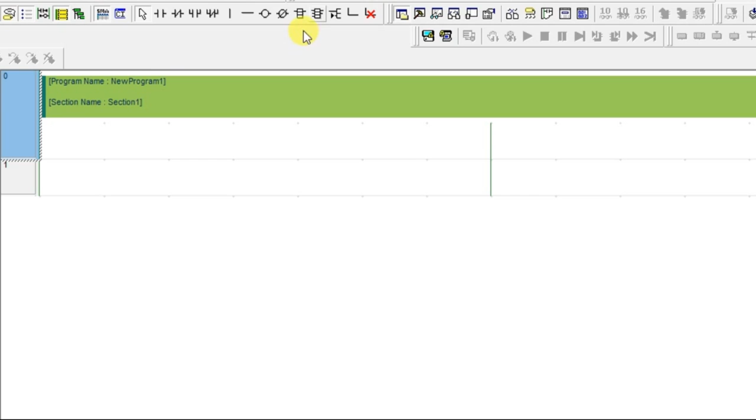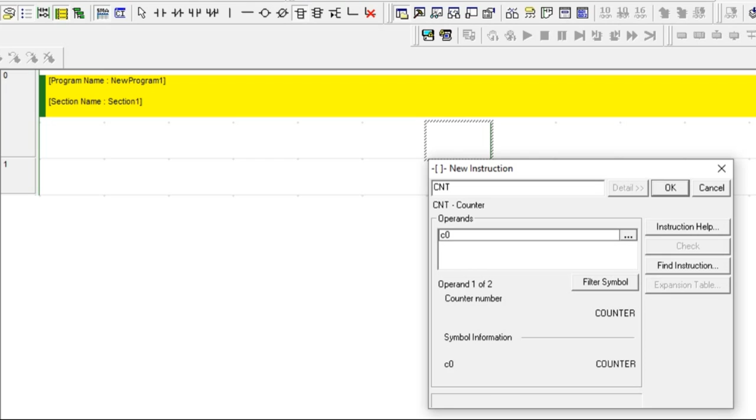Let's take instruction and go for detail, find instruction, and there you can find counter. CNT, this is our counter. Let's take that. It is asking for counter number and the remaining variables. I'm giving the counter number as C0. No need of C, you can give directly the number and give OK.

Once you have given the counter number, you need to set the value - how much count you want to make. Let's take an example: the parcel has to move in a conveyor. So you will be having a sensor. Let's add one sensor here.

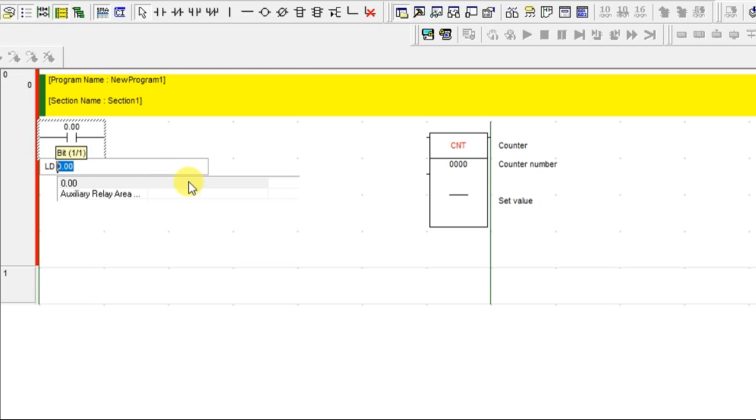Sensor - so whenever the sensor is giving an input, the counter has to increment. Let's take how much count we can do - let's take 5. If once 5 parcels crossed, I have to turn on an alarm. So just type hash and 5.

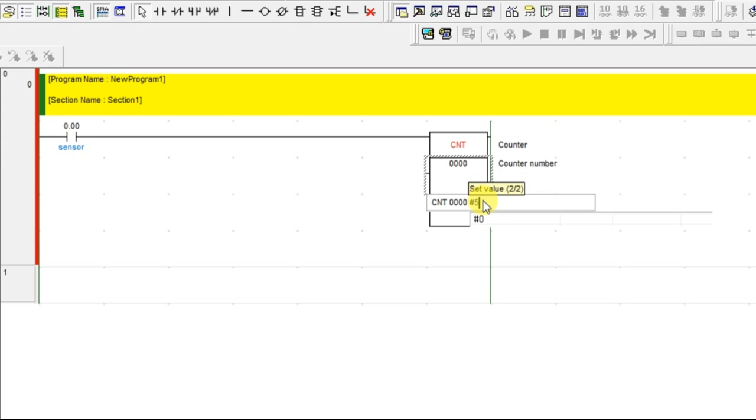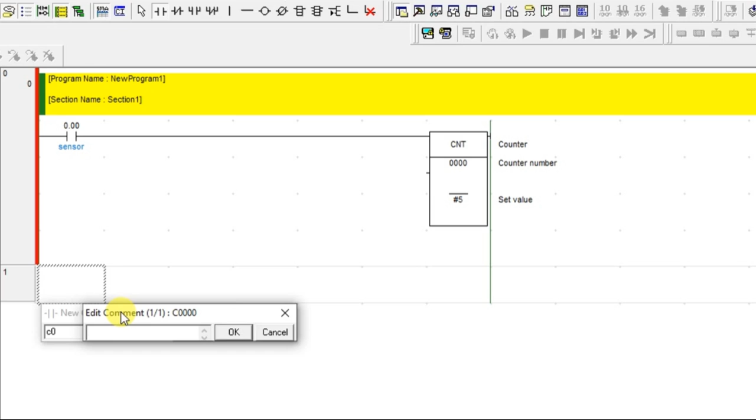That's it, so like this only you have to give the set value. So for every 5 count, it will give a signal. That signal, the feedback from the counter, you can take same as how we take it for the timer - you need to give the counter's address and give it as a normally open contact. So when this contact turns on, whenever the 5 value is reached, it will be on. I'm going to turn on one alarm bit or buzzer bit - let's take it as a buzzer output.

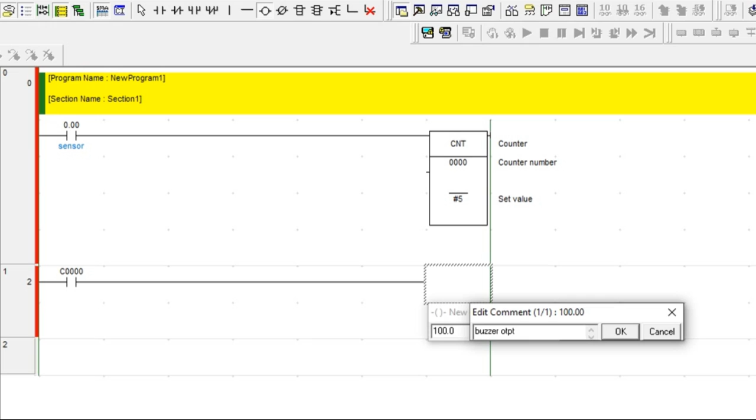Now if you see the counter, we have one more input here. What does that input mean? That is for the reset. So the counter has a reset input - all counters will get reset to start from the beginning.

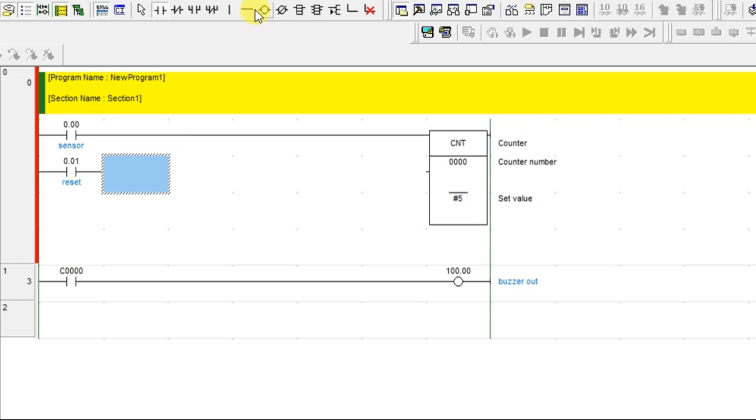After 5 counts, what will happen? The counter output will be in on condition only. Once the output is on, it will stay on only. So how are you going to turn it off? You have to reset the counter.

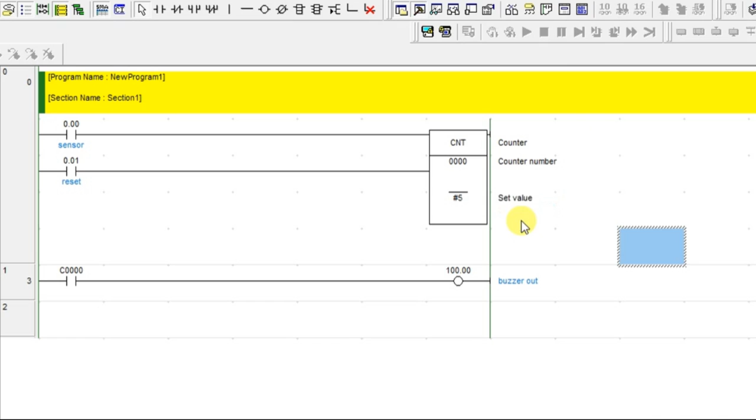So let's compile. Let's go online. So there is a 5 count, right? Let's say the conveyor is on.

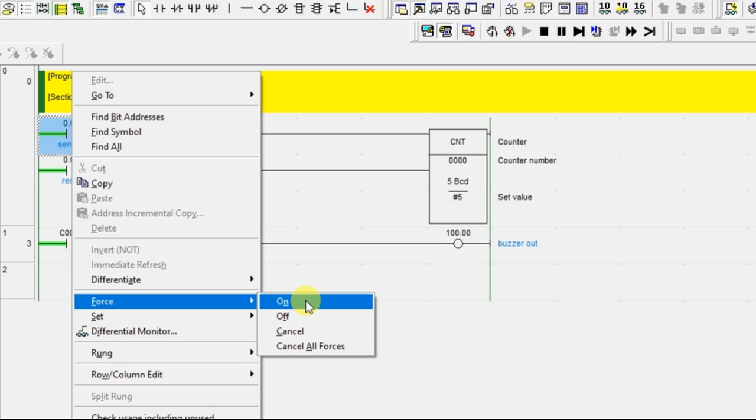Imagine the conveyor is on and one parcel is going to cross. I'm turning on one input, imagine this is a sensor. The sensor is giving one input. Let's see the counter - its value is reduced to 4. So it was 5, now it is 4.

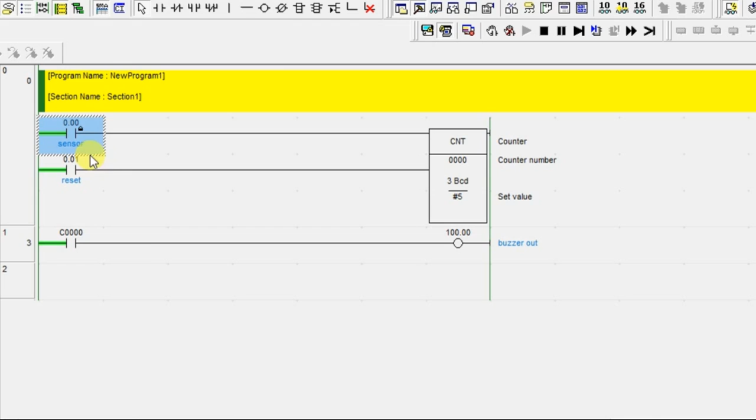So turn it off. Again one parcel comes, it is turning on - so one more parcel, so 3 parcels have crossed. Now the 4th one. Now the 5th one is going to cross.

Once the 5th one has crossed, you can see the output is on - the counter's output is on. Look, the buzzer output is on. So it will be like an indication, right? So now what happens if the 6th parcel comes?

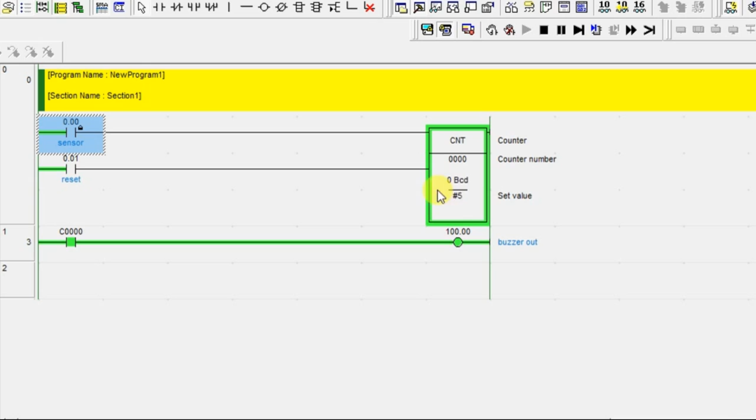Nothing is happening - see, it is not at all taking it, because once the limit is reached, the counter will not respond to your sensor. I'm turning it on, nothing is happening. So what do you have to do? You have to reset the counter.

Reset - that's it. Once you have pressed the reset, it will be same as the previous, like the fresh one. Again you have to start. So the second parcel is happening.

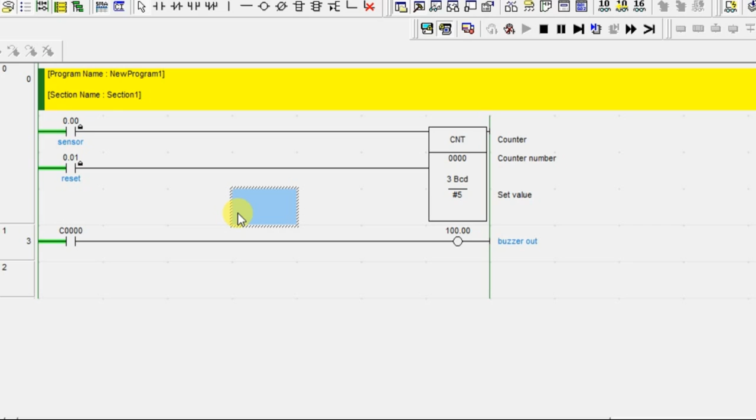It's crossed. Okay, so now there are some cases where you want to start from the beginning - you don't want the two parcels counted. So you have to start from the beginning, meaning you can make use of the reset bit to start fresh. That's it - so in between, if you want to reset that counter, you can make use of the reset bit.

I hope you have understood this counter concept. I'll meet you in the next session with the up-down counter concept.